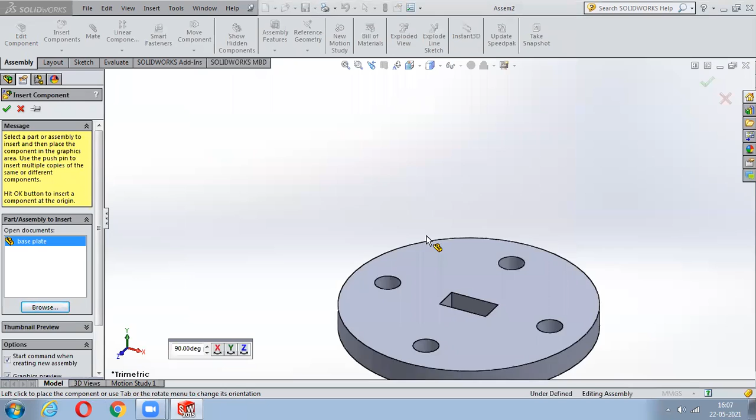Be careful whenever you try to bring the first part - it should be the base, meaning it should not have any degrees of freedom and should be fixed. Just click on this and say open. Now you can see the base plate has come here.

Once it comes here, it is not free - it is directly fixed. So what I'll do is give a right click on this and say float. Now I have assigned degrees of freedom to it, meaning it can easily rotate and move - it can do anything.

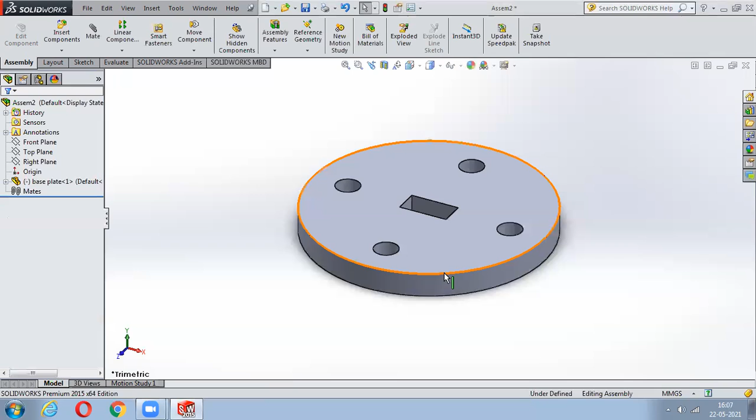Now I'll click here on this - can you see this specs symbol here? Yes sir. Just switch on this axis, the origins. Now you can notice two origins, right? Yes sir. So one origin is for that particular base plate, and the other origin is for this assembly workbench.

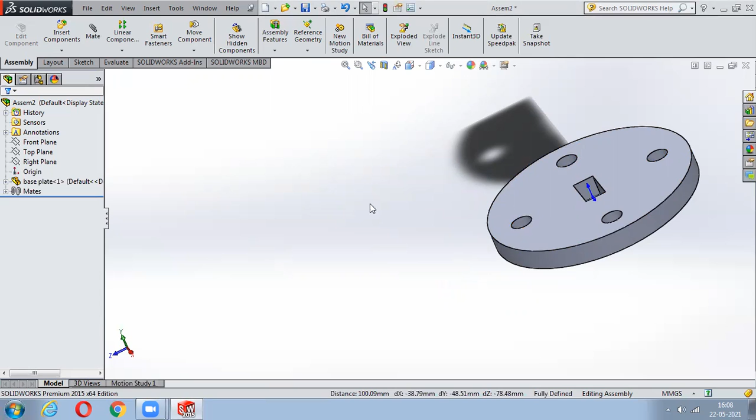Now just click control, select this center point and this center point, leave the control, and make them coincident. Once you click on this coincident, it will be coincided. Now I'll make it isometric.

Now what I'll do is again give a right click on this and make it fix. So now this particular part has been completely fixed to the assembly workbench.

So next, same thing again - I'll click on insert component, say browse, and bring this bolt. I'll place it somewhere like this. Now what I'll do is directly click on this mate.

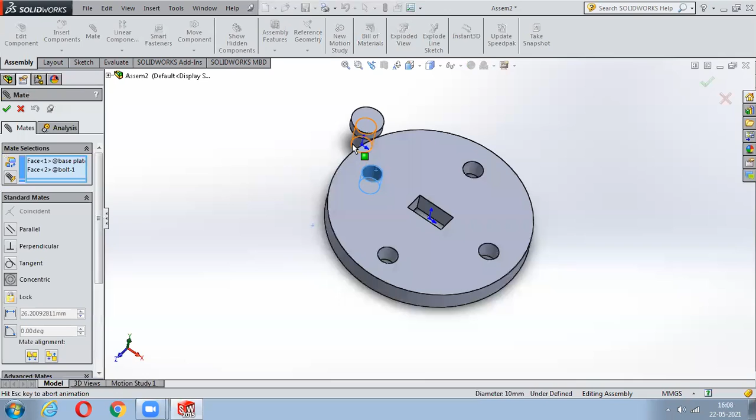Can you see this mate here? Yes sir. Just click on this mate, then select this hole and this bolt. See, it has been fixed, right? Automatically it will fix, you don't need to worry about anything. Once it is done, just say OK to it.

Now I'll just take it a bit above - sometimes it will be fixed here. So I'll go with move component, click it, and drag it up.

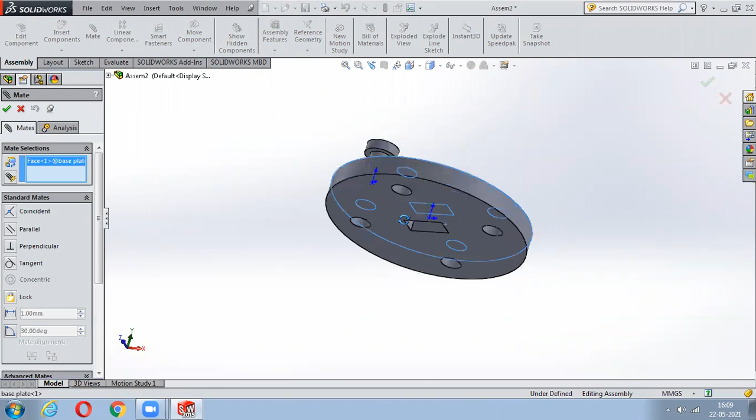Now if you want to say again, I'll go with mate. I'll select this base and select this part here. See, automatically it has become coincided. If you want to leave some gap, I want to leave a gap of 1.5 mm.

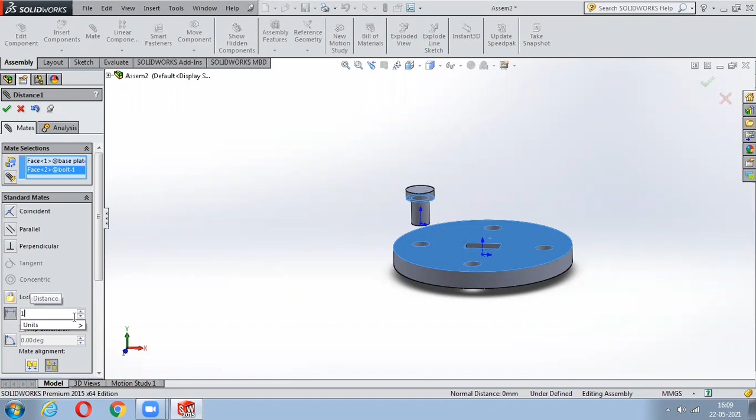So what I'll do is click on this dimensions here - can you see this dimensions? Yes sir, distance. Just click on distance. Now assign the distance, I want some 1.5 mm of gap, and I'll say OK to this. Now just say OK to this guy here. Now you can notice there is some gap, right?

Yes sir, even the software itself will give you the constraints automatically, so whatever constraints you want, it suggests. But if you want, you can change it also.

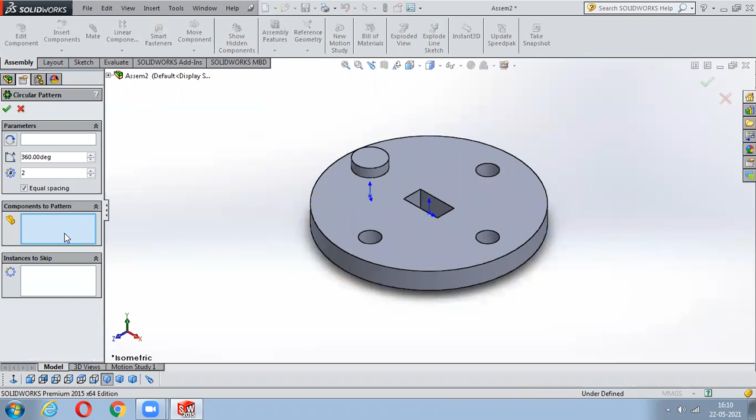Okay sir, so next I want this to be a pattern. I have linear and circular pattern options. I'll click on circular component pattern. Now it's asking which components to pattern - I want to pattern this, and select the axis I want to pattern on. See, now it has come as 2, I'll click it and make it 4, then say OK to this. Easy, right?

Yes sir, any doubts? No sir. No sir, okay great.

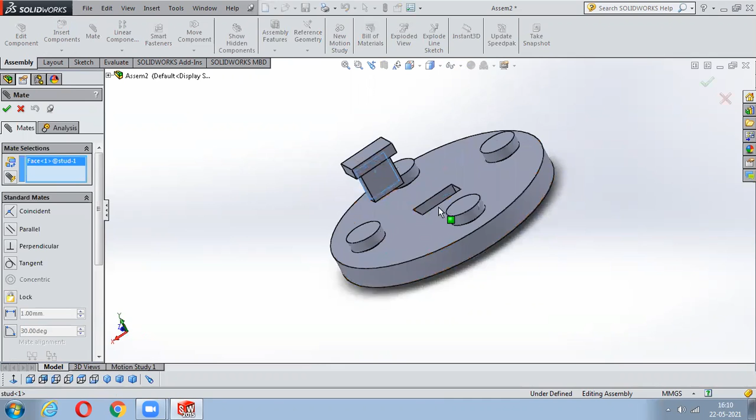Now again I'll click on insert component, I'll say browse to it, and go with this stud now. Just click on this stud, say open to this. Now bring it and place it somewhere here. Again, go with mate. I'll select this face and this face, say okay to this. Again I'll just select this face and this face, say okay to this. I'll select this face and this particular face and say okay to this.

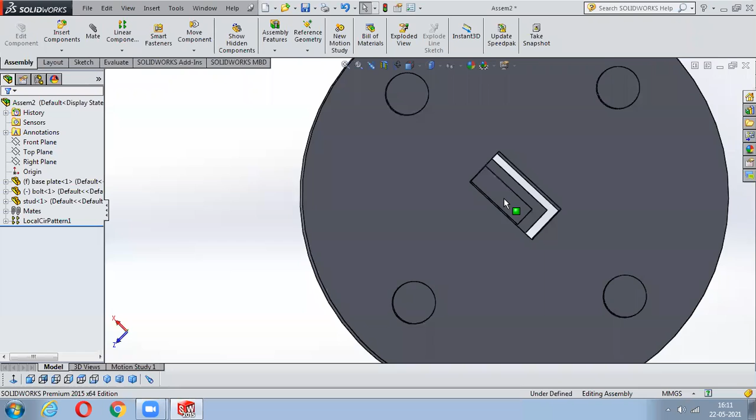Now you can notice it has been placed, but if you notice, there is a lot of difference here, right? It is not exactly at the center.

So to make it at center, what you have to do is instead of standard mates, go with advanced mates here. So I'll just go with insert component, click on browse, bring this stud here, and place it somewhere like this. Now I'll click on mate, but I won't use the standard mates - I'll switch it off and go to advanced mate.

Even in that I have symmetric. By using symmetric, I can easily place this. But to make this symmetric, I have to create a center axis line, right? So to use symmetric, we should have an axis line.

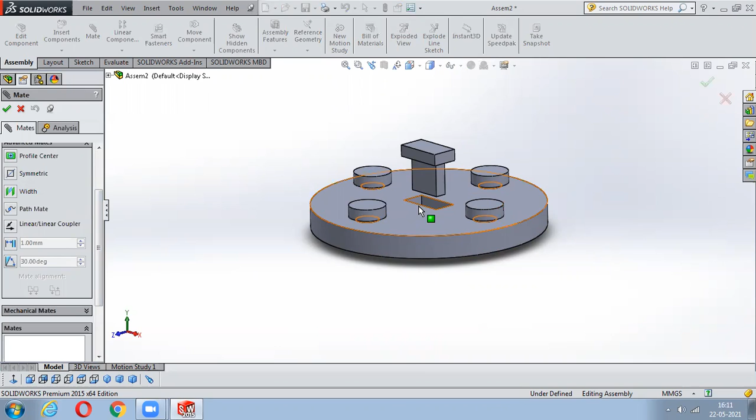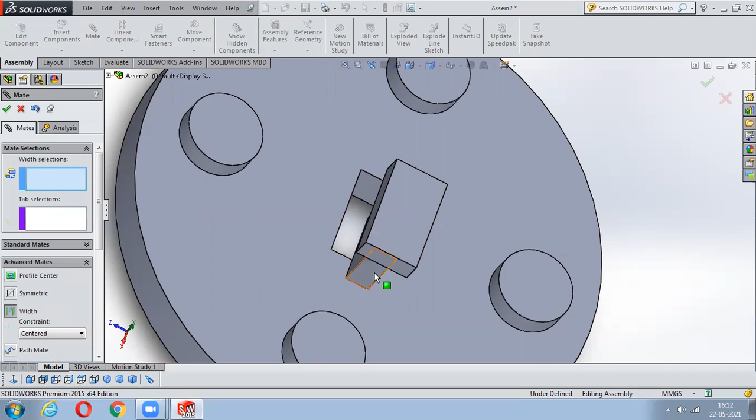So construction line - to overcome that, I'll go with width here. I'll select this width, then select this face and this face, and these two faces should be equally divided with this face and this face. Once done, again I'll go with this width, select this face, and this face should be equally divided with this face and this face. I'll say okay to this, guys.

So now again I'll go with mate, and I'll take advanced mate only - standard mate, sorry. I'll select these two faces and say okay to this. Now if you can notice, it has exactly placed at the center, right?

Yes sir, yes sir, any doubts, any issues? No sir, no sir, okay.

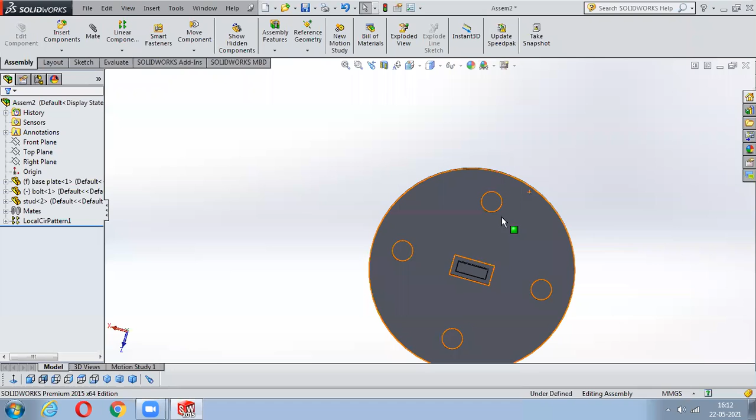Okay great, so now the next thing we have is called smart fasteners. If you have downloaded this thing called SolidWorks Toolbox, you will get it, but only if you have the licensed version. Here you'll get smart fasteners - that means M10, M20, standard size bolts and all. So show hidden components means if you have any components hidden, it will show; if it doesn't, it won't show anything.

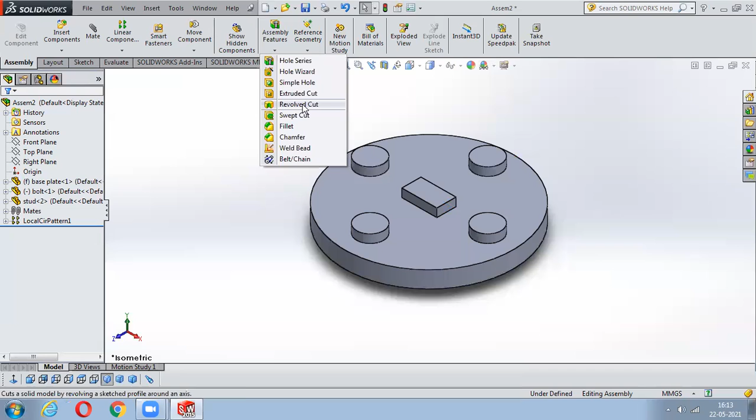So next we have assembly features. If you want to edit these parts again, you can create some holes. For example, see, I'll just make this fillet here - a fillet of some 5 mm - and say okay to this. Notice, right? You can edit it again. So if you have missed something, you can do it again.

So next you have motion study. This motion study I'll explain with the next part - not in this part, you can't understand this motion study.

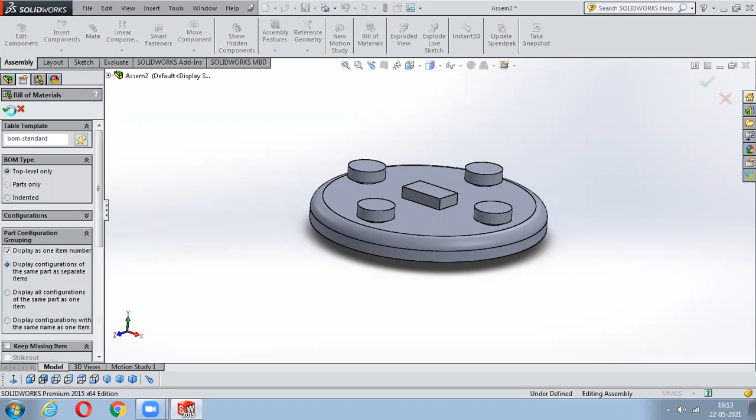So next you have to create the bill of materials here. Just click on this bill of materials, say okay to this, say okay. Now you can notice the bill of materials has been generated - bolt, base plate - if you want to write some description, just double click and start writing on it, write whatever you want. Next I'll decrease the size of this guy like this.

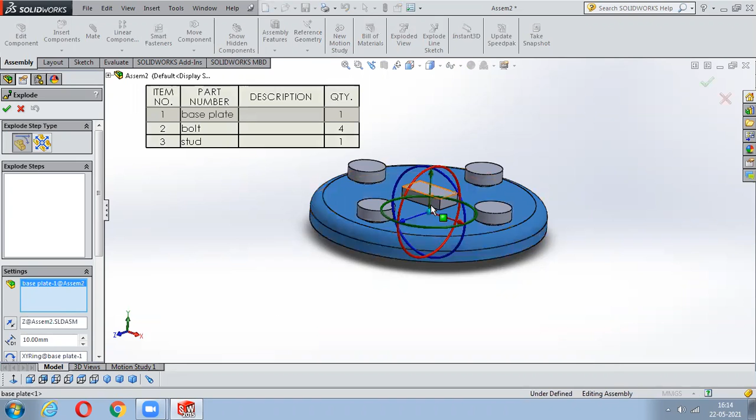So next you have exploded view. Just click on this exploded view. You can say how you want to explode this, just see. I'll click it something like this, so it will be exploded. Wait, I'll just need to assign the dimensions - so what happens is it will just go away from those things.

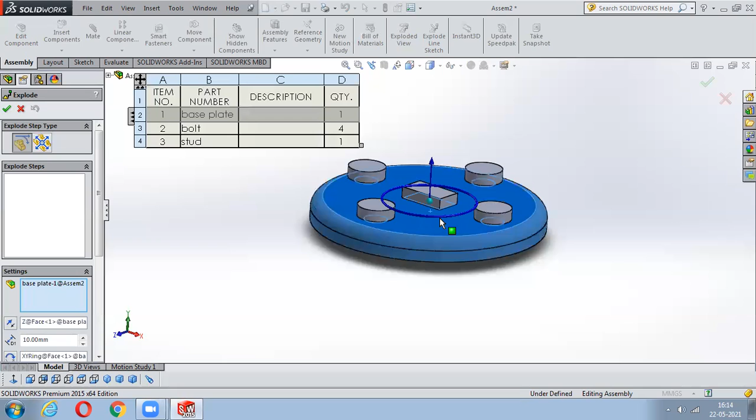For example, see, if I want to take it out, I can take it out easily. Can you see this? So by using this way, you can easily explode these things. So instead of exploding all this, what I can do is I'll just explode this guy only, just to see what small parts have been left out. You can easily notice these things.

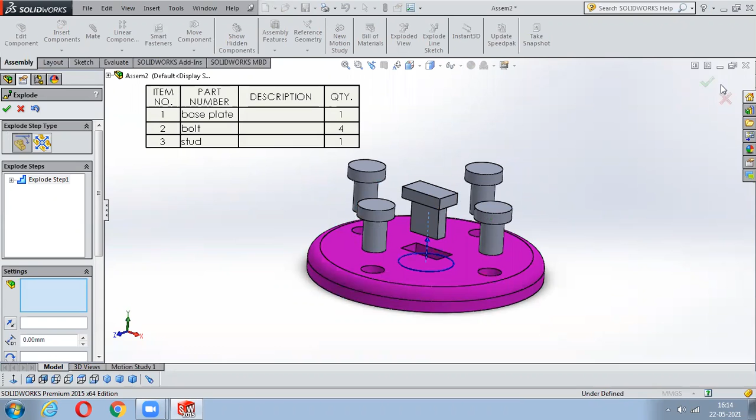Just say Control Z, it will be coming back again. Any doubts, any issues? No, sir. Okay, so this much you have in your assembly.

So we'll just directly jump to the drafting part. Sir, how to make the threaded bolts and threaded nuts, sir?

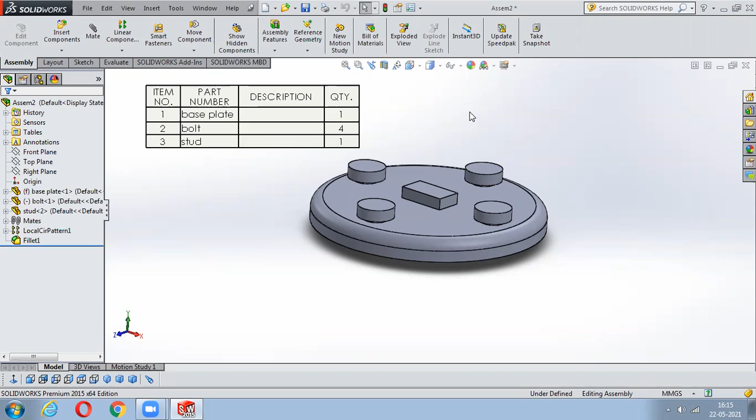Yes, sir, so wait, I'll explain you. See, if you want to create threaded bolts and nuts, it is easy. See, just go to this part. Oh sorry, I should not have taken this plane. I'll take this plane here.

Should I just explain you later, after this drafting part? Yeah, okay sir, you can explain later.

Okay, so to enter into the drawing workbench, you just click on this, drawing, and say okay to this. So now once you enter, it will ask you the sheet sizes, whatever you want. So just select what sheet size you want. And if you don't want this tabular column, you can just switch it off here. So it's okay, it's better to be keeping that tabular column. Once it is done, just say okay to this.

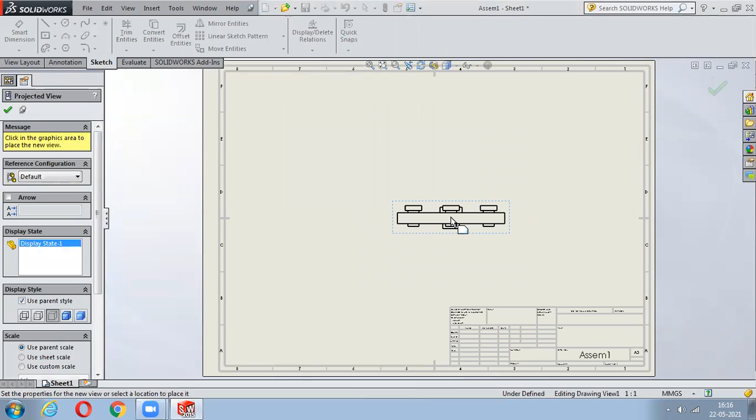Once you have completed, again you have to just click on this view layout. Go with model view, select which part you want to be doing this drafting. I'll go with the full assembly. So just click it here, say open. So this will be the front view, the top view, the bottom view, the left view, and the right view. It totally depends on the angles of projection what you have selected.

To select those angles of projection, just click on the sheet and go to properties. Here you can see the type of projection, first angle or third angle. In first angle, the top view comes in bottom and the bottom view goes in top; left will come in right and right will come in left. In third angle, top will be on top, bottom will be on bottom, everything will be the same. Getting my point?

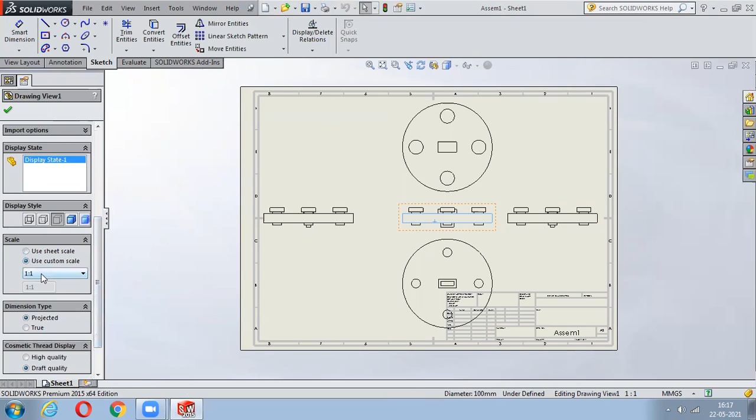Yes sir. Okay, so if you want to reduce the sizes of it, just say use custom scaling. I'll go with 1:2, see, it has been decreased. So now you can just bring them easily towards it. See, like this, you can arrange it in the sheet.

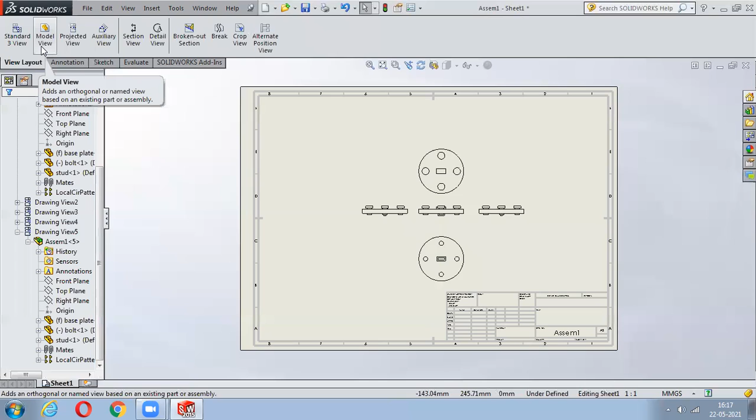Any doubts, any issues? No, sir. So you just need to click on this view layout, just go with this model view. If you are bringing a single part, for example, this is what happens. I'll say don't save. So now I'll go with new here.

So drawing, I'll say I just don't want this sheet formats and all. I'll say browse to it. I'll just bring this bolt here, place it like this, and say okay to this.

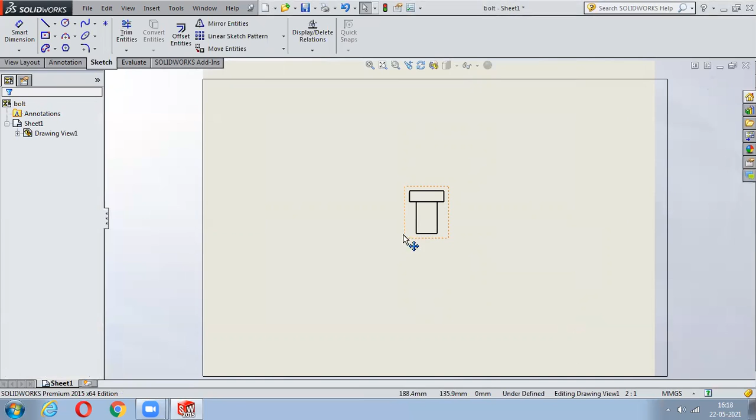Okay, so if you want to bring the standard 3 views, just click on standard 3 views and browse to it. Once you say okay, wait sorry, I'll just delete this. Now I'll just go with standard 3 views, browse. And if you select this bolt and say open, directly it will give you all the 3 views.

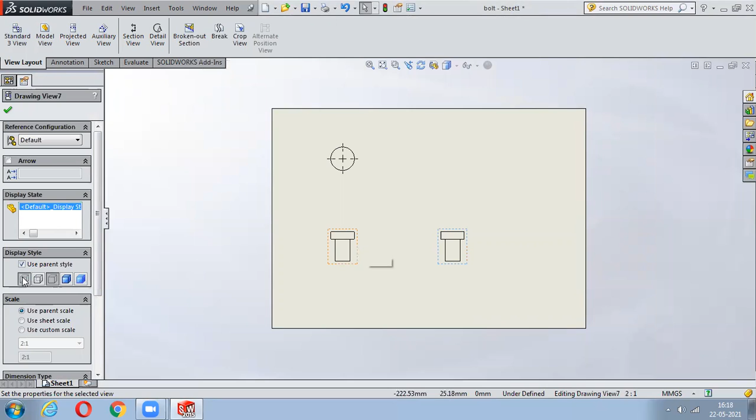Okay, even you can change the view styling. So if you want dotted, you can get dotted, if you want solid, you can get solid like that. Any doubts? No, sir. Okay, good.

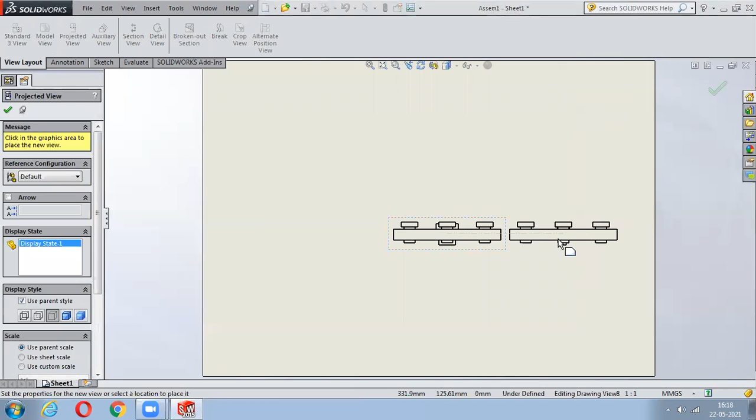So now I'll just go with a single part itself. I'll go with this, the full assembly. I'll just click it, take this 2 views. If you want isometric view of it, just drag the mouse like this.

So instead of dragging straightly, just drag it towards away from it. You will get an isometric view of it. So just place it somewhere here. So once everything is done, this projected view we don't use just because it will give the projected view of this again.

So we'll get the projected views directly. Next, what I can do is the auxiliary view for this kind of isometric views. So this is called the auxiliary view of this isometric drawing.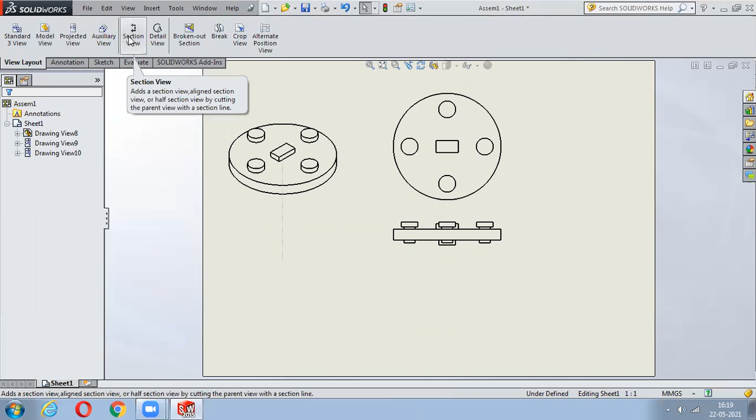Next is very important - that is called a sectional view. I'll delete these things so you're not confused, and go with the sectional view. If you want to take the sectional view of this, just click somewhere here and say okay to this. Now you can notice the sectional view, the cut section view of it.

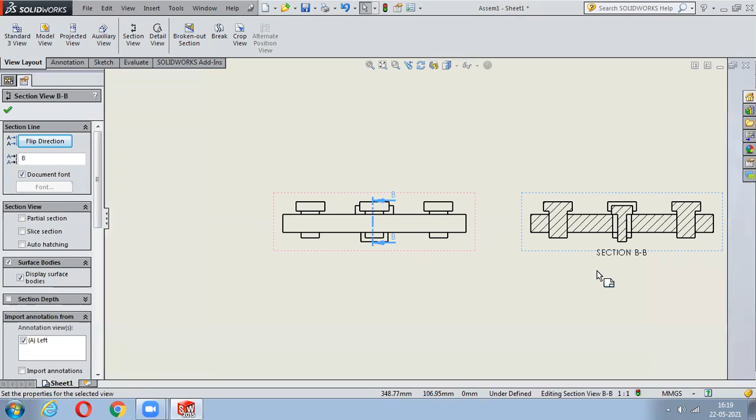Any doubts how to take it? It's easy. Just click on the sectional view, place where you want to get the section view, and say okay to it. So you'll get that sectional view at that particular point. See, section view B-B is giving the sectional view.

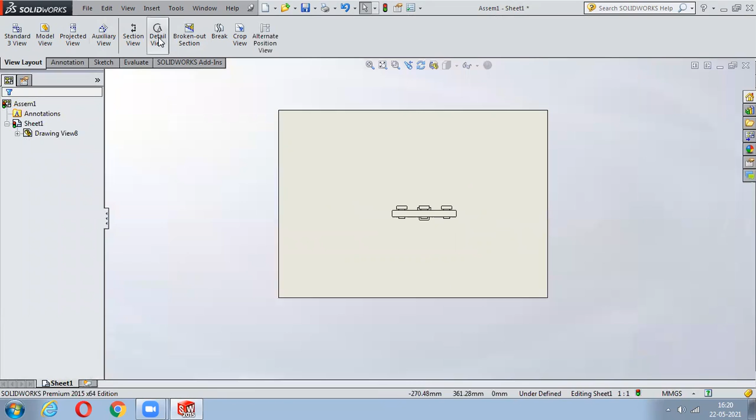Next is this detailed view - this is used to just get the small things highlighted and noticed. For example, I want to highlight this corner. See, it will be highlighted. Got it?

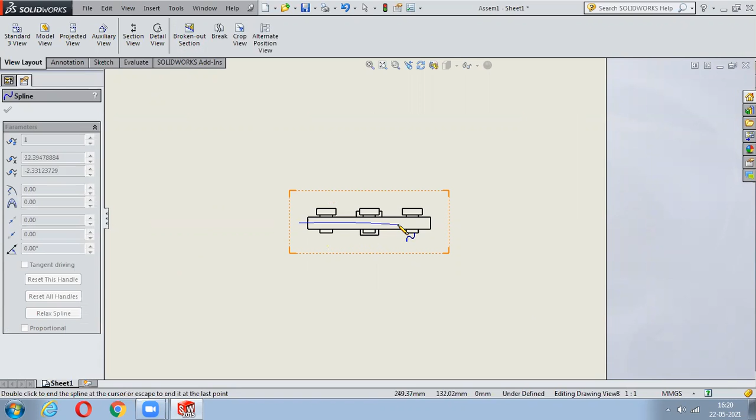So the next thing we have is called the breakout view. So this breakout section - instead of using it, to create this breakout section you have to deal with this kind of things. Instead, what we'll do is go with this break.

So what I'll do is break it from here to here. Why it is used: for example, the sheet size is around 420. If you have a rod of around 1000 mm, you can't place it inside with the scale of 1:1. So what we'll do is break it in the middle and it will be shortened. Got it?

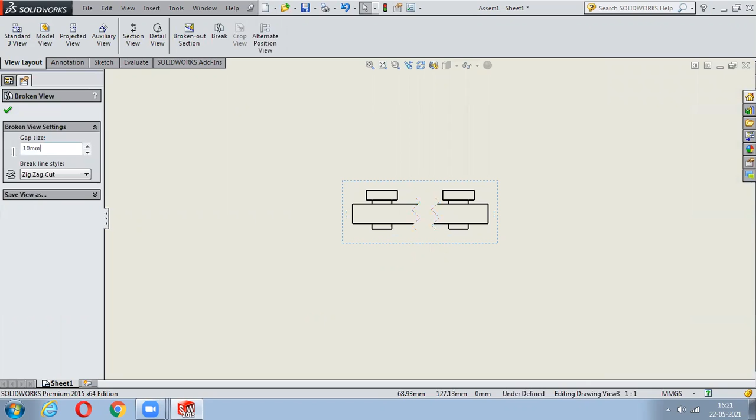Even you can maintain the gap - I'll say 10 mm, it will be 10 mm. You used to do this when creating your rivets, right? This kind of zigzag means it is still continued.

Any doubts? Any issues? Got it, right? No, sir. Okay, yes sir.

So the next thing we have here is called the crop view, which we don't use. This alternate position view also - you cannot alternate position view for the selected object. So these alternate views are used for totally assembled sketches.

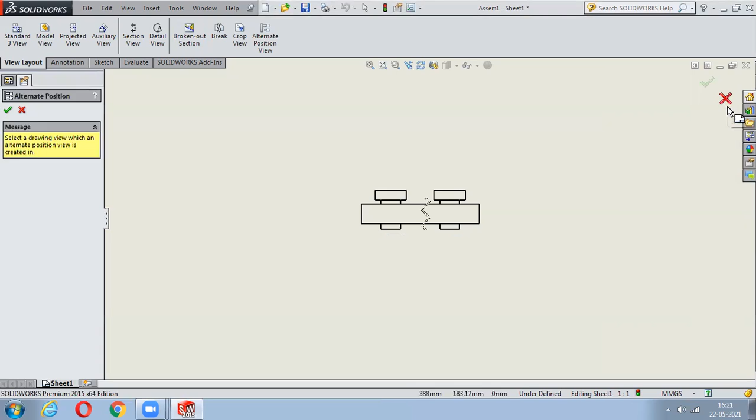Now what we'll do is move on to annotation. Here you can give all the dimensions to it. I'll bring some another part here - it has been broken and all. So I'll just save this base plate and bring these two views of it.

So now if I go for this annotation, you have smart dimensions. Here what you can do is give the dimensions to it. I guess I don't need to explain this - you can easily assign the dimensions to it, right?

Any issues giving the dimensions? No, sir. It is easy, but the thing is you can't change the dimensions. So the dimensions you have assigned at the time of sketching will carry the same dimensions, okay?

Any doubts? No, sir. Sir, can we create our own sketch and bring it to drafting? No, only models can come. You can't create sketches here - only models can be converted to 2D.

Okay sir, so next we have the spell checker. If you have written something, for example a note like this, if you want to check whether it is correct or not, we'll go with the spell checker. Same way, if I have written something here, you can pattern the text as well.

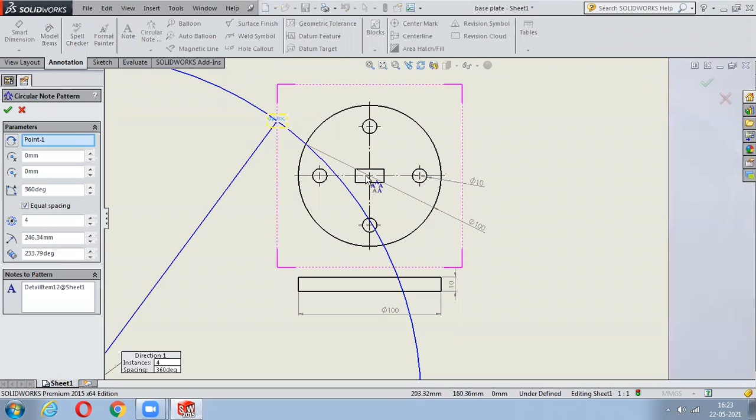So I'll go with this circular patterning - just select this. So it is something like this. Once you say okay to this, see, it will be patterned like this. Got it? So it is used for patterning and all.

So next it is called balloon generation. It is used for the sake of giving your surface finishings and all - at that time you'll give these balloon generations.

So next we have auto balloon generation. If you say auto balloon generation, it will generate ballooning automatically, only for an assembled sketch. Now what I have taken is a single sketch. So if you go with the surface finish and click on this, you can give all the surface finishes you want. If you have checked your workbook, you have GD&T symbols and all - by using those GD&T symbols, you can assign these things, okay?

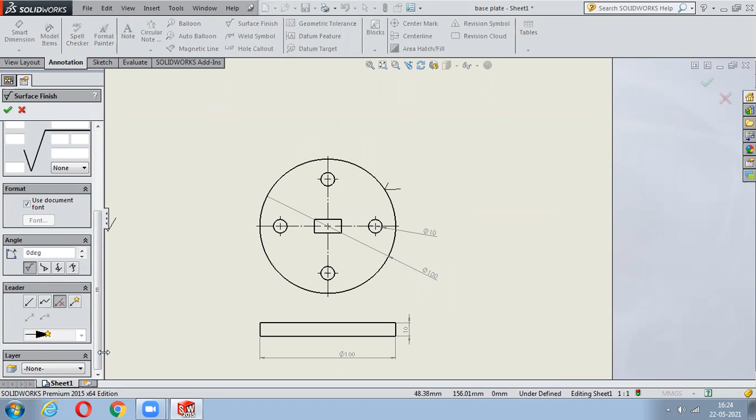So next what we have is hole callout. If you just click on this, it will give you all the details of that hole. Say for example, it's a diameter and it's a through hole. If you have given some dimensions, it will show you the dimension, the depth, how much you have given each, and everything.

Next we have geometrical tolerances. You can assign all these, and if you have read that workbook, you'll get to know what are all the dimensional geometrical symbols you have.

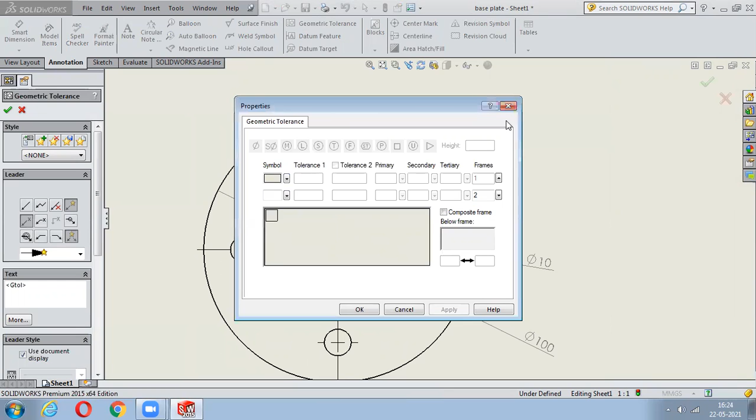Next we have datum. These datum targets are again used for the geometrical constraints. You can write each and everything here - what is the amount of surface finish, what is the amount of material to be removed, what is the diameter to be maintained, and which tool you have to use to remove that material and all.

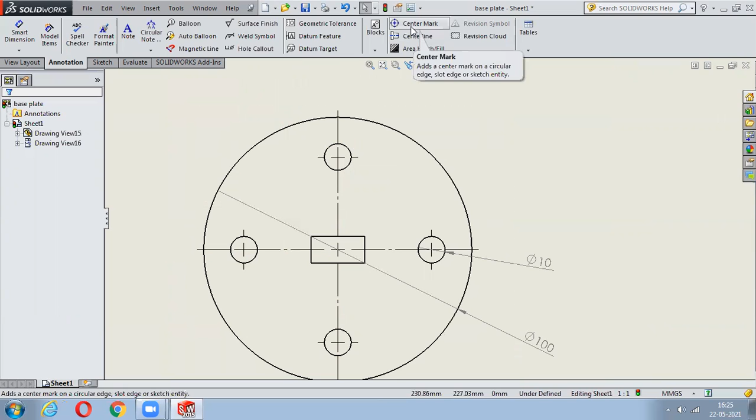So next, these are all the basic things. This is called a center marking. Already the center markings are there. If you don't have the center markings, just click on this, it will give you the center markings and all.

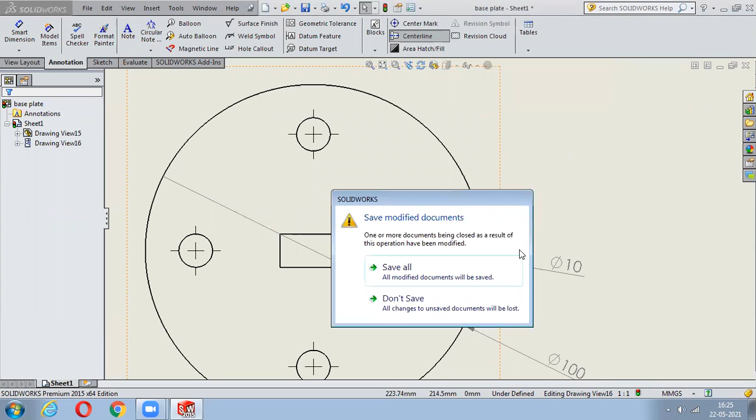Same way you have the center line. For the center line, if you just click on this, you'll get a center line. Okay, got it right? Center lines.

So area hatch and fill, if you just click on that, the hatching will start. You can go with solid, none, or you can assign all the angles and boundaries, regions. If you go with hatching options, you can change each and everything. If you click on this hatch, you can assign what sort of hatchings you want.

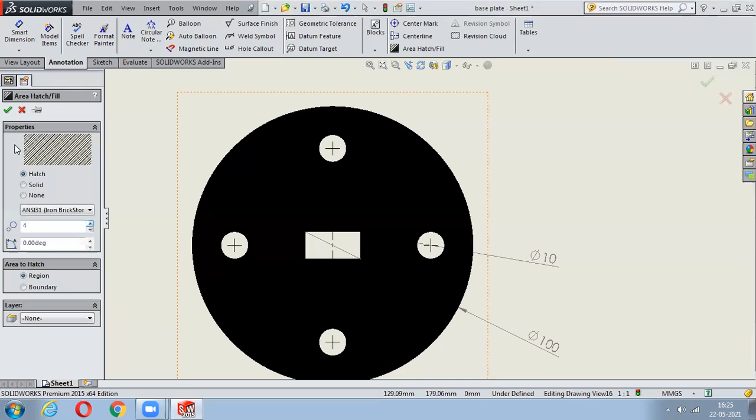Any doubts? No, sir.

So this is called a revision cloud. This is just like a cloud so that you can write something in here whenever you see. So this will act as an important thing here.

So next we have table. General table we have - however many rows and columns you want, just click it and that much of rows and columns will be created. At the same time, you have a hole table. If you just select that hole, it will assign each and everything - how much distance you have taken in X, how much distance you have taken in Y. You can give all the values here. That is called the hole table.

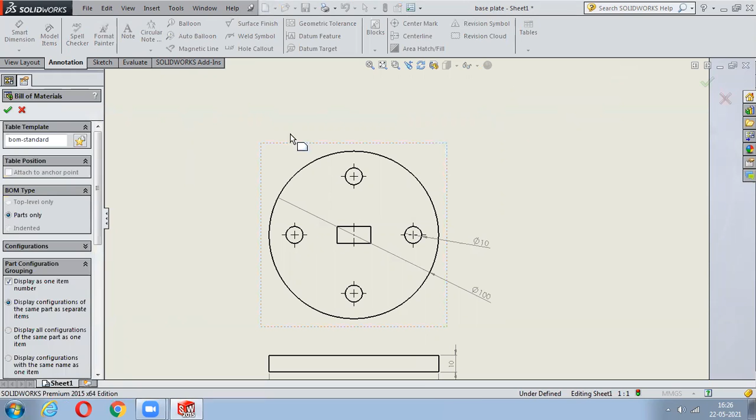So last is called the bill of materials. You say okay to it. Now I have taken only the base plate, that's why it is showing only the bill of material for the base plate. If I had taken the whole assembly, it would give the full bill of materials.

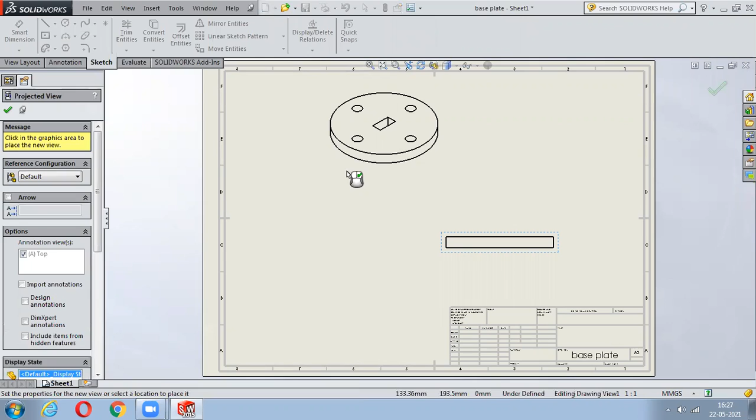Okay, so wait, I'll just switch on that. I'll use the display sheet also. So now I'll just go with browse. I'll just bring this guy out here. Browse. I'll just bring this assembly here.

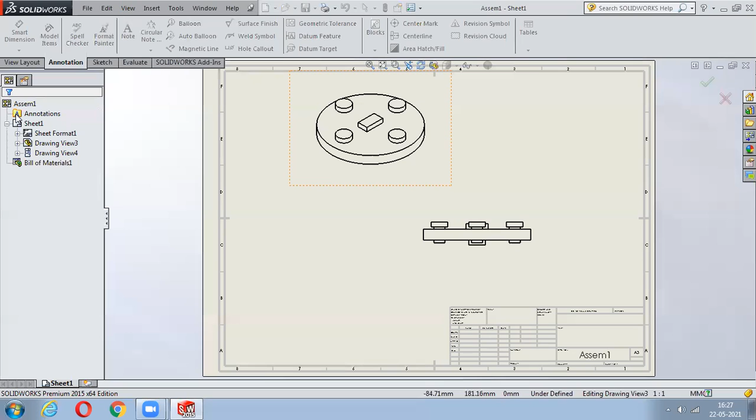Okay, so now if you go with this bill of materials, it will give you all the bill of materials. What are all the things it has? See, base plate, bolt and stud. If you can just zoom in here, I have told you, you can just double click and you can add whatever text you want.

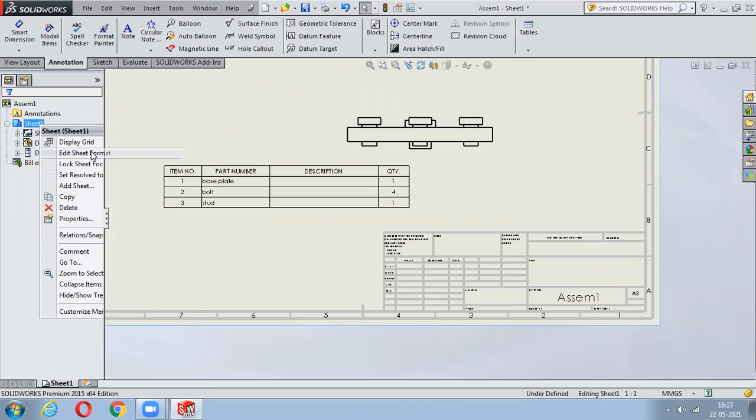Okay, yes sir. So same way, if you want to edit this, just give a double click on this guy, or else you just go on the sheet, right click and go with edit sheet format. So then you'll get this. Whatever you want to write here, you can go ahead and write finished by whom, when you drew this, what is the name of it, everything.

Okay, so once it is done, just say exit to this. So again, it cannot be changed. Once this thing has been changed, you can't change it again. Any doubts?

How to bring the models and how, no sir.

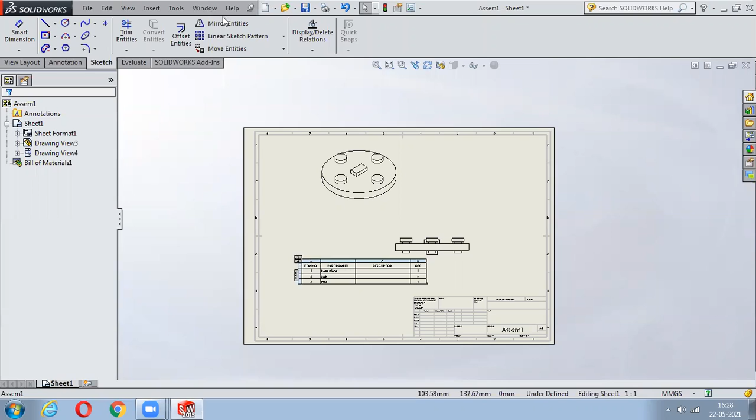So now here, if you have forgotten something, you can sketch it here. So to do extra sketches and all, you should take the permission from your authorities. You can't create sketches irrelevantly on the drafting sheet. Any doubts?